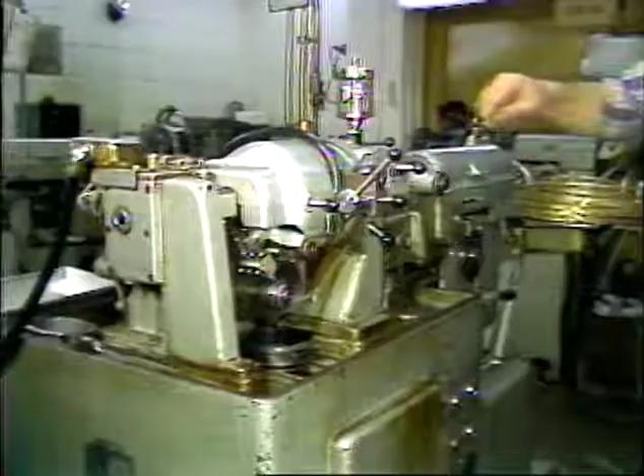Located on the front of the model D4 ESCOMATIC is the indexable drill turret. Located on the indexable drill turret are two driven drill spindles. The position of the drill spindles is adjustable for centering them to the stock guide bushing.

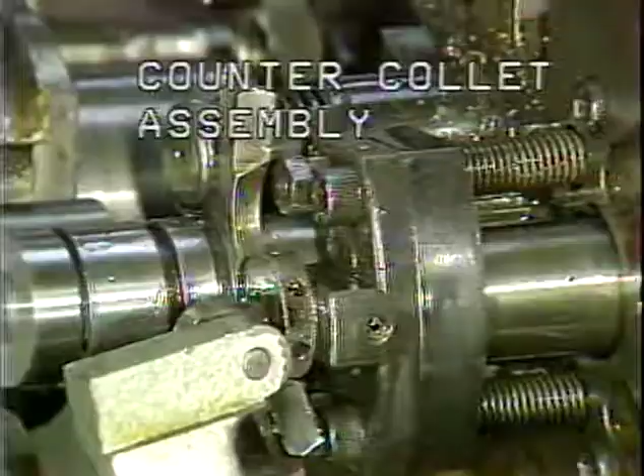Also located on the indexable drill turret is the counter collet assembly. The counter collet assembly is adjustable for centering independently from the drill spindles.

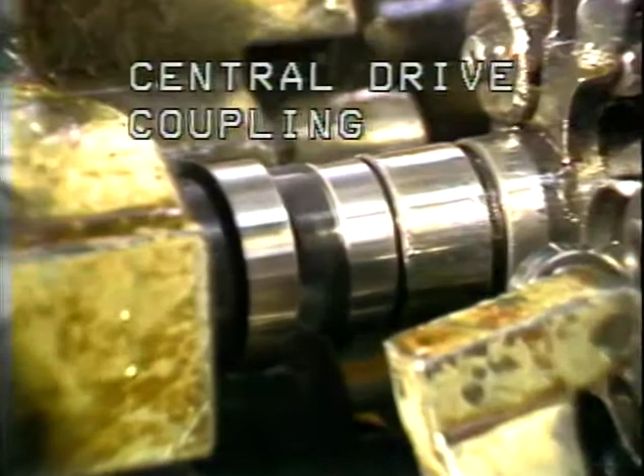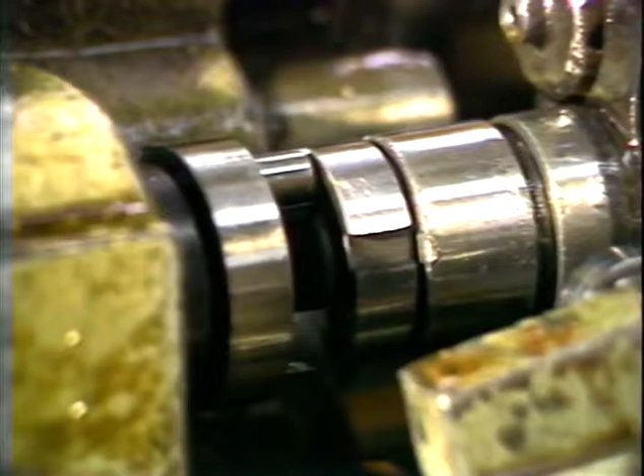Located here is the central drive coupling. The purpose of the central drive coupling is to supply rotation to the drill spindles. The coupling is driven from the drill pulleys in the base of the machine. Drive to the coupling starts and stops with the main motor.

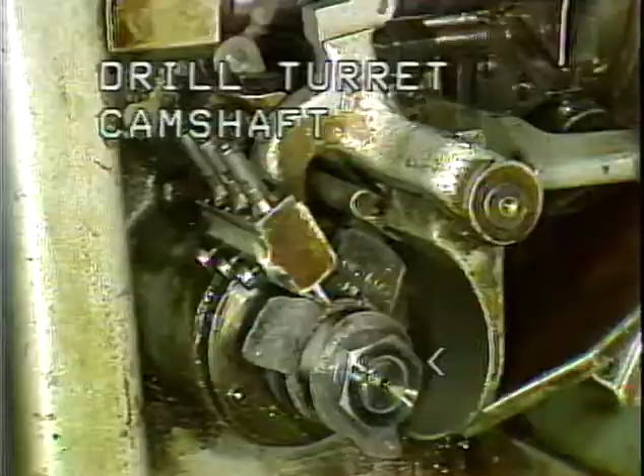The approach, feed, and return of the drills and counter collet into and out of the tooling area is controlled by the cams on the drill turret camshaft. Zero of the drill turret camshaft corresponds to zero of the main camshaft.

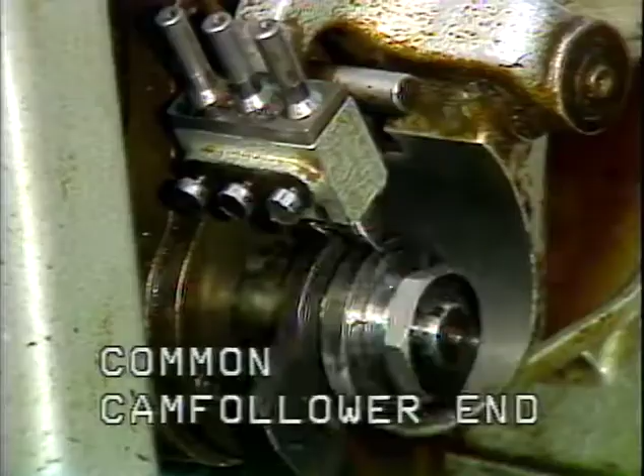This is the drill turret cam follower lever. Located here is the common cam follower end of the lever. The common cam follower end holds 3 cam followers, 1 for each cam.

Located at the opposite end of the drill turret cam follower lever is the contact roller. The purpose of the roller is to contact and move the drill spindles and counter collet into the tooling area.

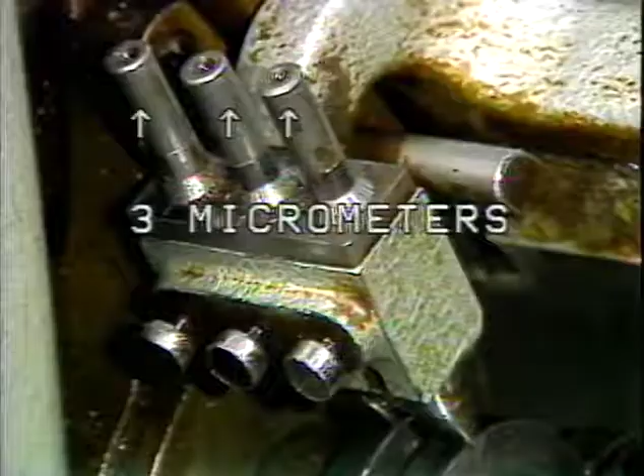Located on the top of the common cam follower end are 3 micrometers. Below the 3 micrometers are the 3 micrometer lock screws. The purpose of the micrometers is to adjust the exact depth of the drill spindles and counter collet into the tooling area. The micrometer closest to the machine frame is marked tool position 3.

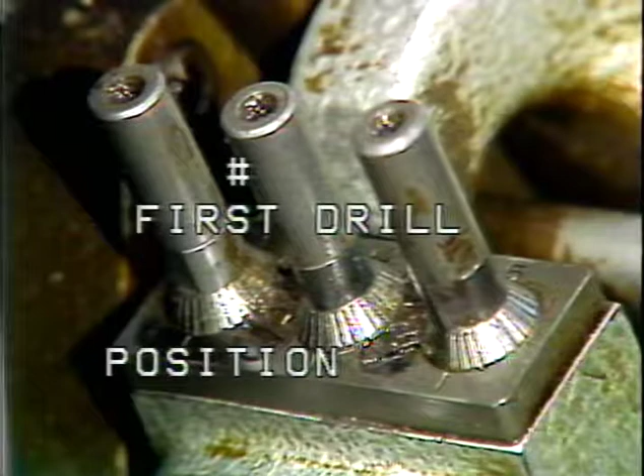This position is usually used to control the counter collet. This micrometer is marked tool position 4. This position is usually used to control the spot or first drill. This micrometer is marked tool position 5. This position is usually used for controlling the second drill.

Located at the base of each micrometer are these gradation marks and index lines. Moving one gradation mark past the index line will be an adjustment of 1/2 thousandth.

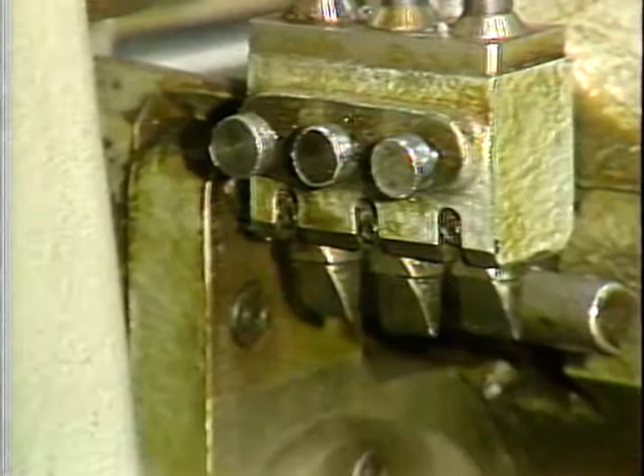Located here just above the cam followers are the cam follower lock screws. The cam follower lock screws hold the cam followers in the cam follower holders.

This is a typical drill and collet cam used on the model D4 ESCOMATIC. Each cam is usually marked as a drill cam or collet cam. This arrow indicates the clockwise rotation of the camshaft.

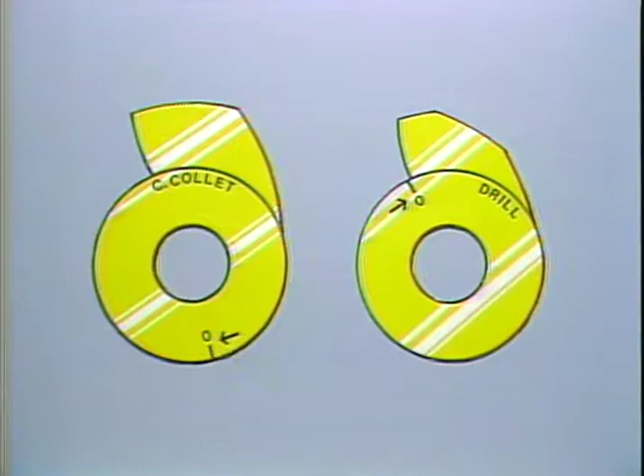Each cam can be divided into 4 portions. This is the rapid approach portion of the cam. The purpose of the rapid approach portion of the cam is to quickly move the tool into position in the tooling area.

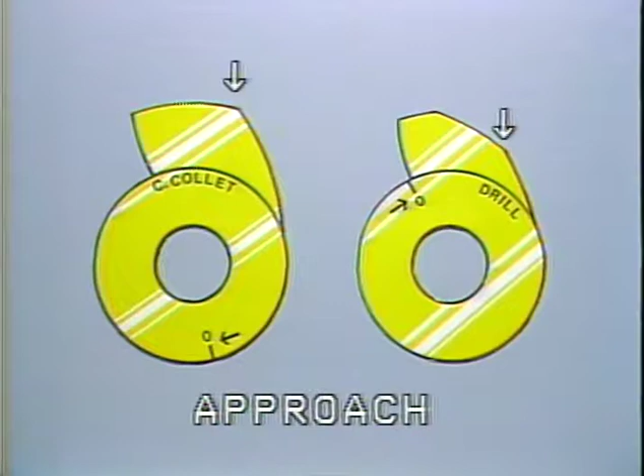This is the approach portion of the cam. The approach is also the start of the feed portion of the cam. The approach is short and only lasts a few cycle degrees. The purpose of the approach is to allow the tools to slowly approach the workpiece before cutting begins.

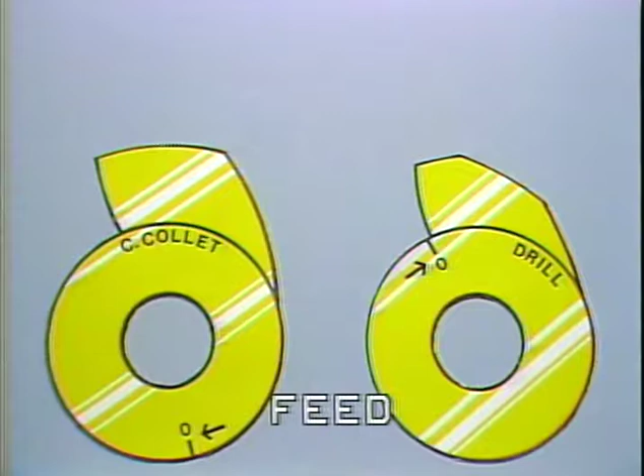This is the feed portion of the cam. On the drill cam, this feed portion can be a rise, fall, or a dwell depending upon the job. The feed portion of the collet cam is usually a dwell. The purpose of the feed portion of the cam is to cause the drill to cut slowly to its correct depth or to hold the collet in position to clamp the finished part at cutoff.

This is the rapid return portion of the cam. The purpose of the rapid return portion of the cam is to rapidly return the tool out of the tooling area of the machine. Indexing occurs just after full return of the cam follower lever and before the rapid approach portion of the next cam begins.

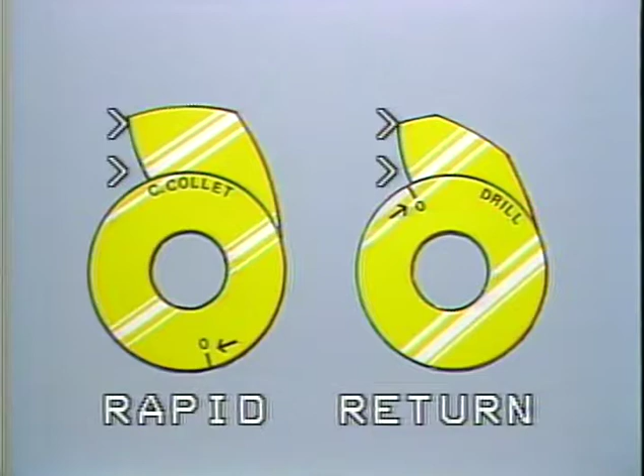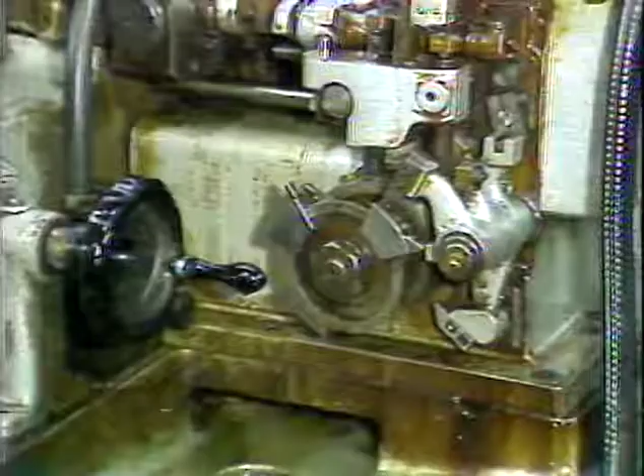Located on the back of the drill turret camshaft are the 3 index trip dogs. Each trip dog will cause the drill turret to index once. The purpose of the index trip dogs is to control the exact time the turret will index.

The index trip dogs contact the index trip dog lever. The purpose of the index trip dog lever is to activate the indexing operation, which is controlled inside the command unit at the front of the machine.

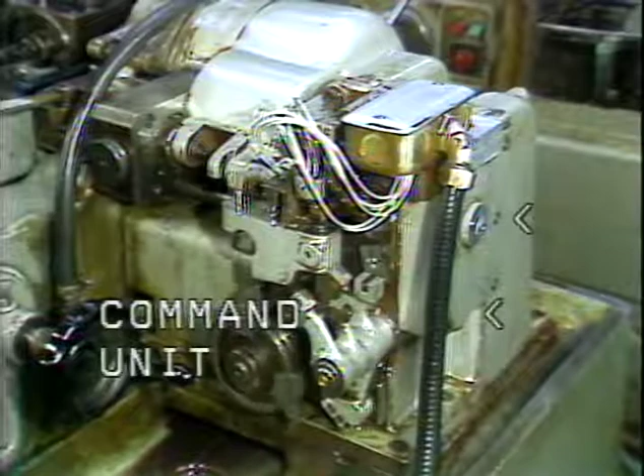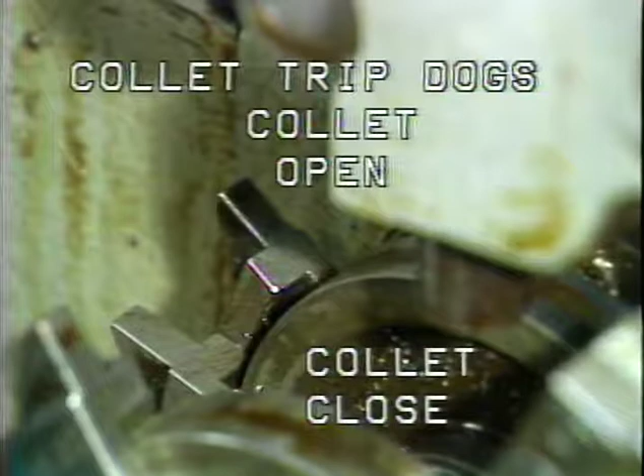Located just behind the 3 index trip dogs are 2 collet trip dogs. One trip dog controls the opening of the collet. The other collet trip dog controls the closing of the collet. The purpose of the collet open and close trip dogs is to control the exact time the collet will be closed, then opened.

The collet open-close trip dogs contact the collet open-close trip dog lever. There is one trip dog follower on the top and one on the bottom of the lever. The lever rocks back and forth as the trip dogs operate it. When the top of the lever is forced back, the collet opens. When the bottom is forced back, the collet closes.

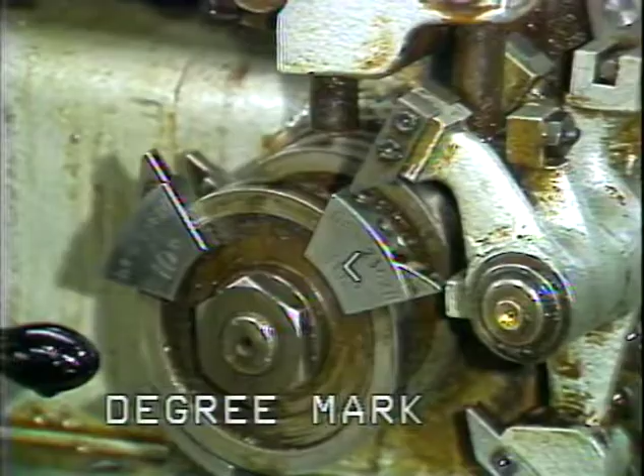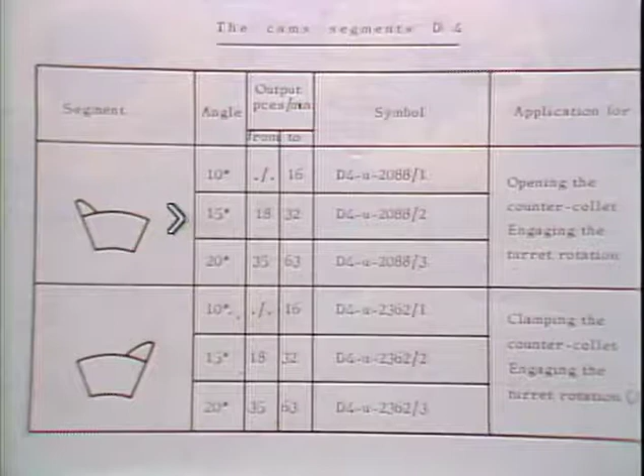Each trip dog is marked with a part number and a degree mark. For different production rates, the trip dogs should be changed to the proper degree marking. For production rates of 1 to 16, a 10-degree trip dog should be used. For 18 to 32, a 15-degree trip dog is used. For 35 to 63, a 20-degree trip dog is used.

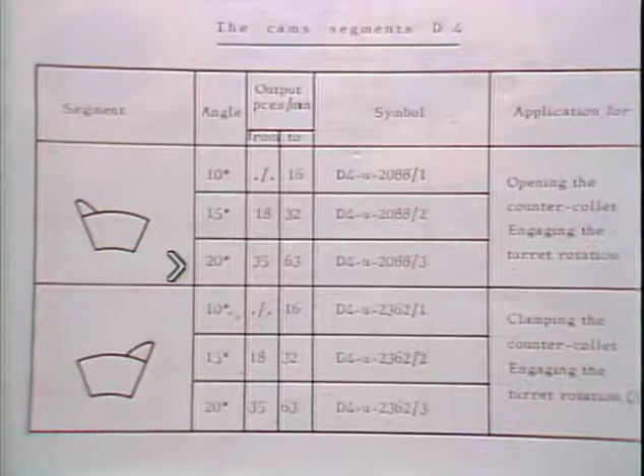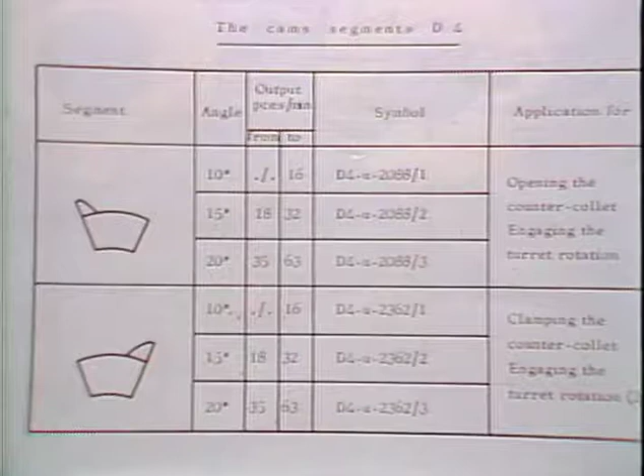Notice that there are also two different trip dogs shown. This trip dog is used for turret indexing and opening the counter collet. Only one of this type is used for turret indexing. This trip dog is used for turret indexing and clamping the counter collet. There are two of this type used for turret indexing, both mounted to the outside of the index trip dog holder.

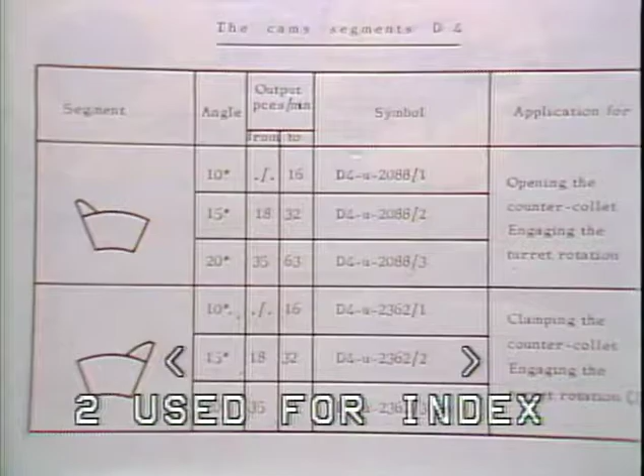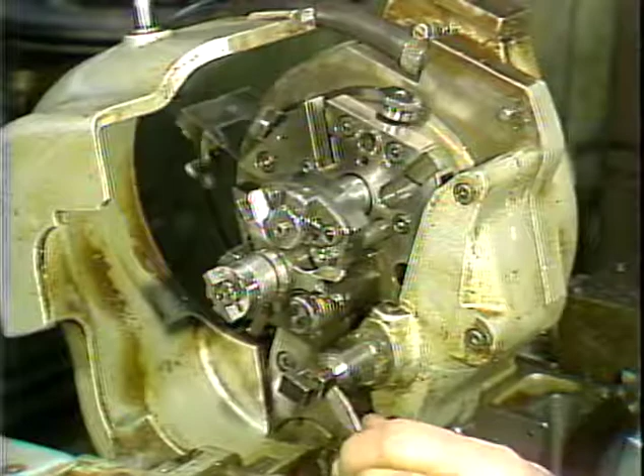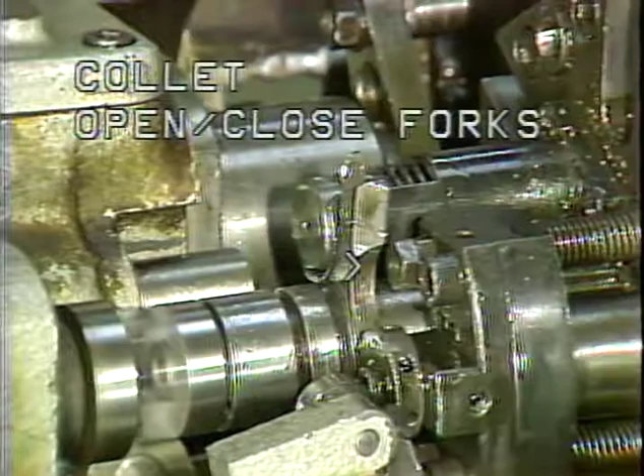Located here, just behind the drill spindles and collet assembly, are the collet open-close forks. The collet open-close forks are moved by this collet open-close finger.

When the collet close trip dog signals collet close, the open-close finger will move the fork up to close the collet. When the collet open trip dog signals collet open, the open-close finger will move the fork down to open the collet.

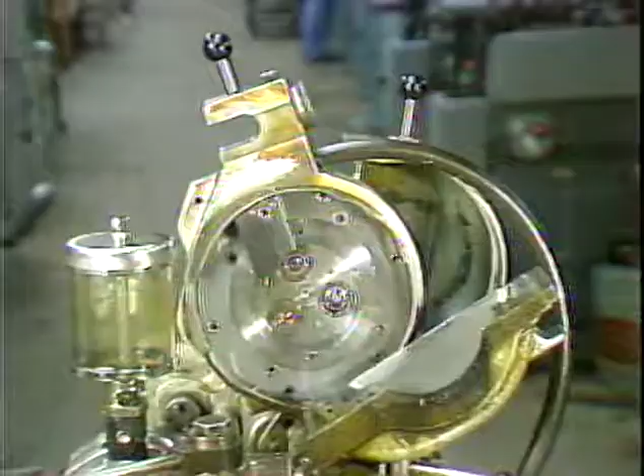This is the face of the drill turret. Located here is the oil tube. The purpose of the oil tube is to provide coolant to the cutting tools and drills during operation.

These are two drill collets. This is the counter collet used to hold the part during cutoff.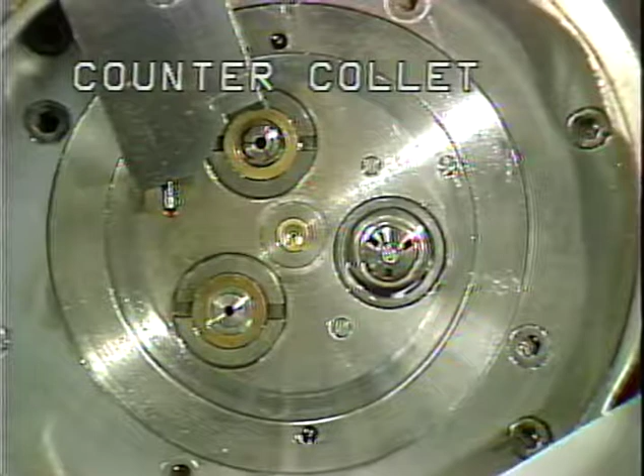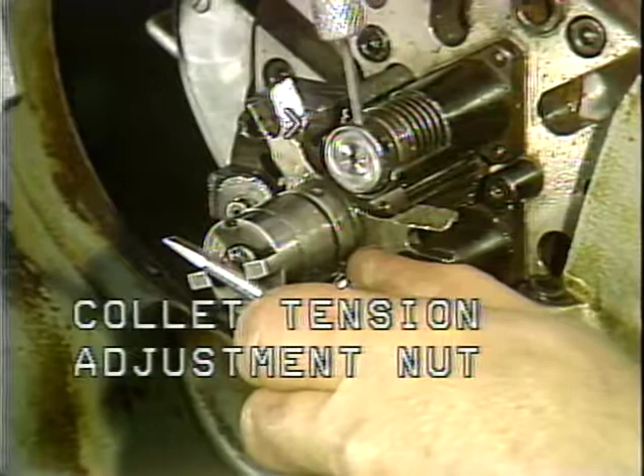To remove a drill collet from the drill spindle, hold the central drive coupling from rotating. Next, turn the drill collet tension adjustment nut on the back of the drill spindle counterclockwise. Continue turning the adjustment nut until the assembly is loose. Remove the tension adjustment nut and collet holder rod combination. The collet can now be removed from the drill spindle. You may have to push the collet loose with the collet holder rod.

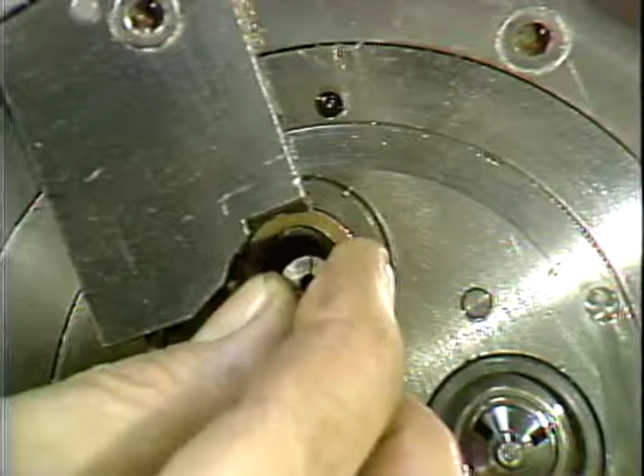These are the basic components of the drill collet assembly. This is the drill collet tension adjustment nut. Its purpose is to adjust the holding pressure of the drill collet on the drill. This is the collet holder rod. Its purpose is to thread onto the back of the drill collet and pull the drill collet back into the drill sleeve.

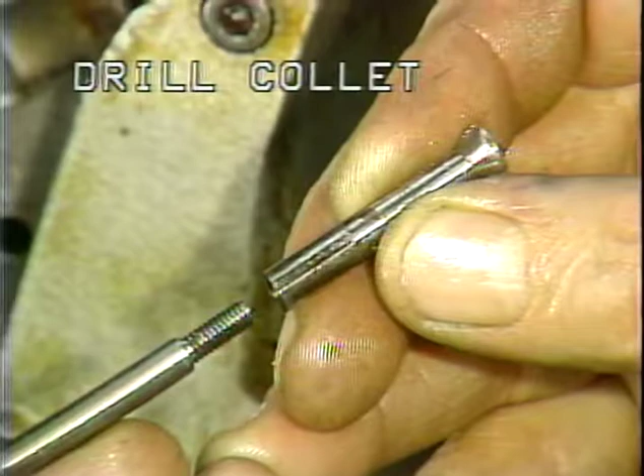This is the drill collet. Its purpose is to hold the drill during the drilling operations. Each drill collet has a keyway that aligns with the key in the drill spindle.

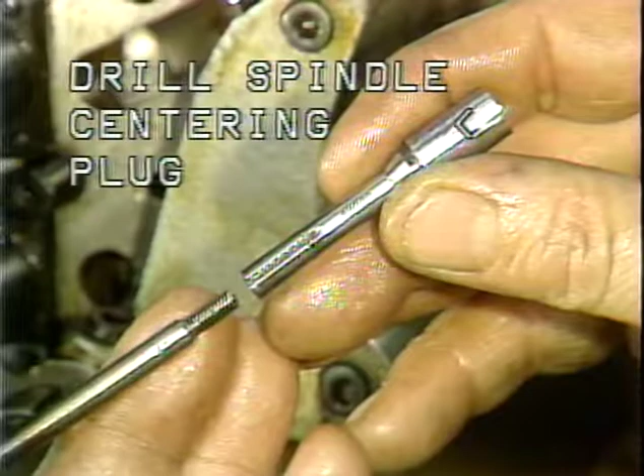This is a drill centering plug. The drill centering plug threads onto the collet holder rod in place of the collet. The plug is used to align the drill spindle to the empty guide bushing bore.

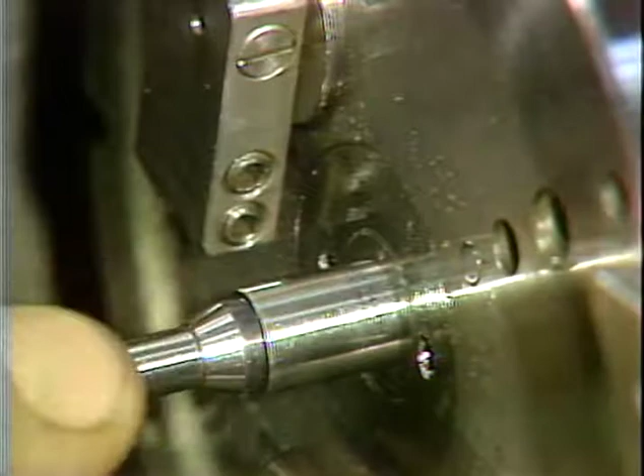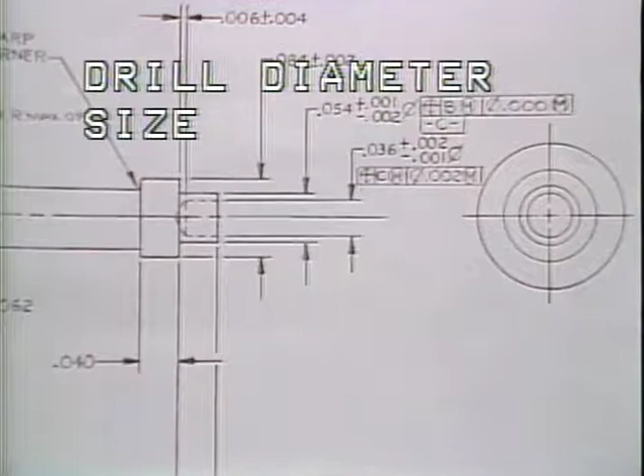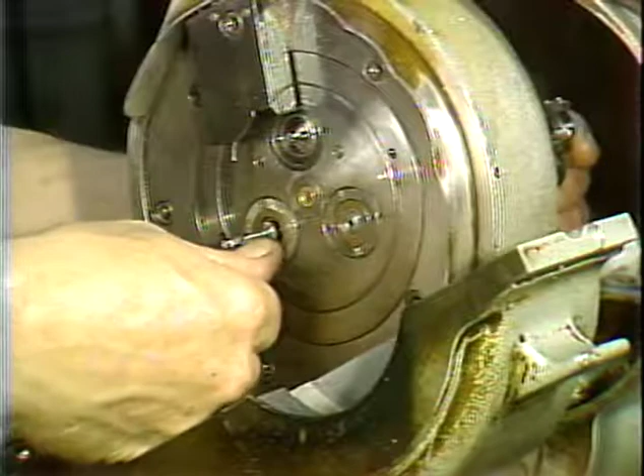Insert the drill into the drill collet. Install the drill and collet into the drill sleeve, making sure to align the keyway on the drill collet to the key of the drill sleeve. Insert and thread the collet holder rod to the collet.

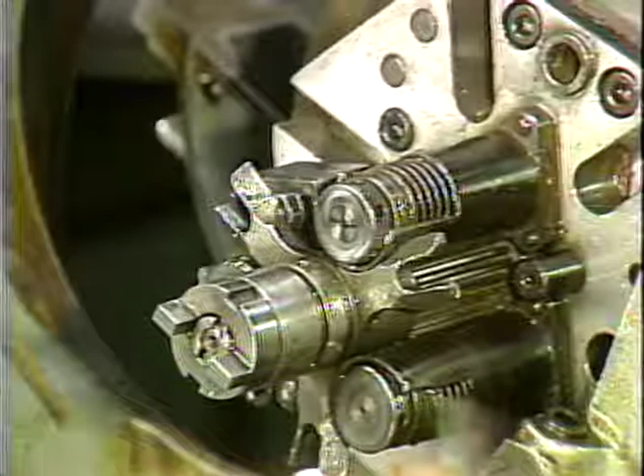Next, measure the distance from the drill tip to the front of the drill sleeve and adjust the drill for the proper dimension. Hold the central drive coupling from rotating and tighten the drill collet with the drill collet tension adjustment nut.

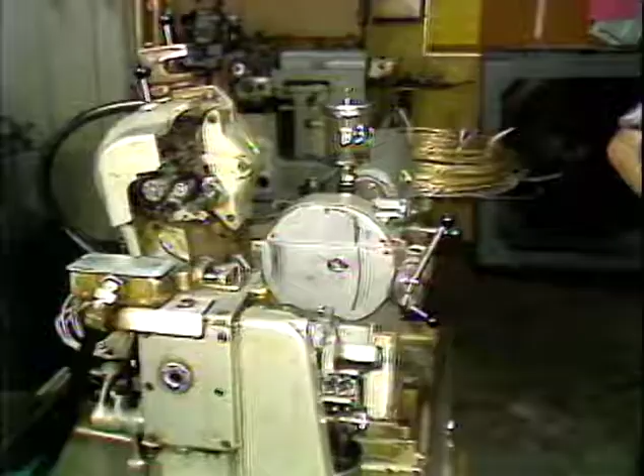Make sure that when the drill turret is lowered, the drills clear the tool area cover by a minimum of 1 millimeter. To remove the counter collet from the machine, first loosen the counter collet holder tube lock screw.

Now turn the counter collet tension adjustment nut counterclockwise. This will unthread the counter collet from the counter collet holder tube. You may have to push the counter collet holder tube forward to remove the counter collet. Remove the counter collet from the face of the drill turret.

These are the basic components of the Model D4 ESCOMATIC counter collet assembly. This assembly uses a spring-loaded ejector pin to eject the finished part after cutoff and indexing.

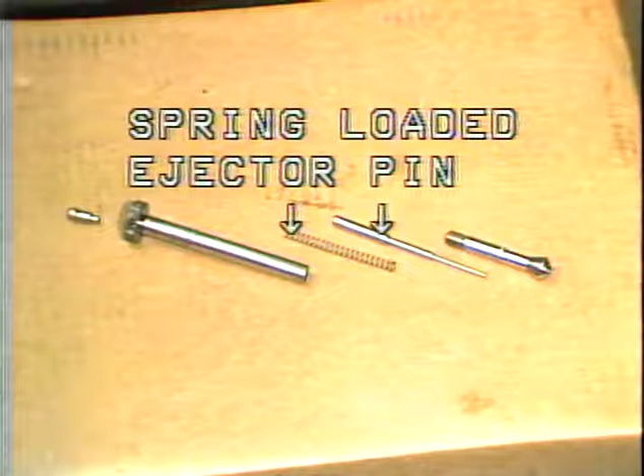This is the counter collet. Each counter collet has a keyway to align with the key in the counter collet sleeve.

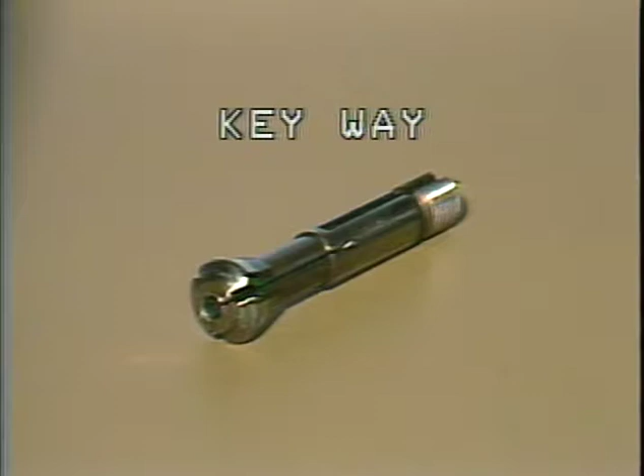The counter collets are marked with the size stock it can grip. The collet size should be chosen to be in the middle of the part tolerance range. This tolerance information can be found on your part print or layout sheet.

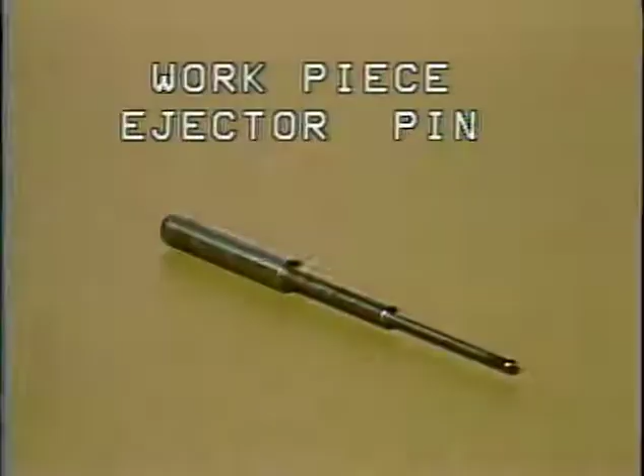This is the workpiece ejector pin. The ejector pin mounts inside of the counter collet. The ejector pin should be chosen so that the tip of the ejector pin is smaller than the size of the collet opening when the collet is closed. This will make sure that when the collet closes, the collet will grip the part and not the ejector pin.

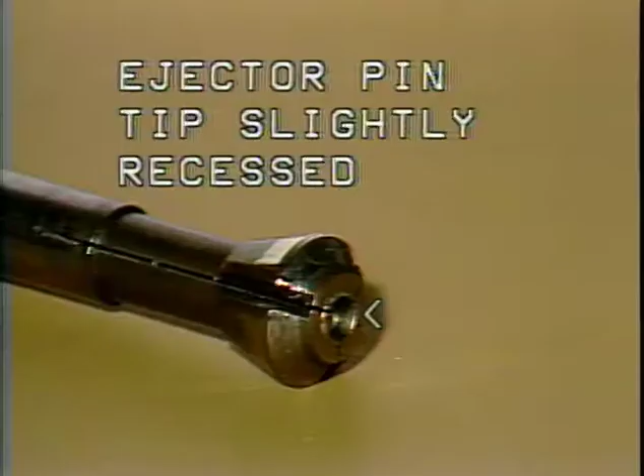When installed in the collet, the ejector pin tip should be slightly recessed into the counter collet. This will allow the part to enter the collet before contacting the ejector pin.

This is the ejector pin spring. The ejector pin spring is compressed as the part is fed into the counter collet. The collet then closes to hold the part. After index, the collet is opened and the ejector pin and spring force the part out of the collet.

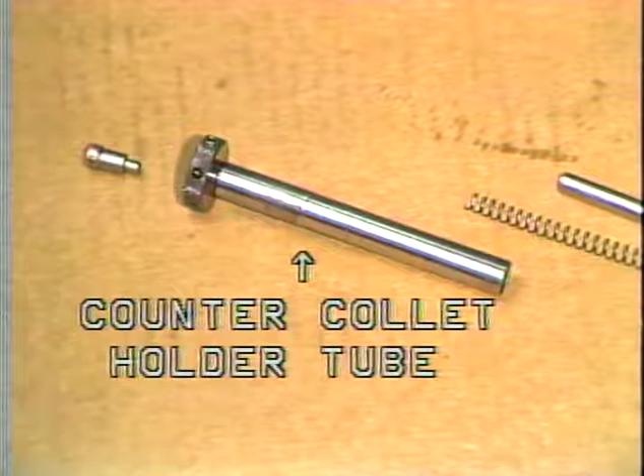This is the counter collet holder tube. The counter collet holder tube threads onto the back of the counter collet. At the end of the counter collet holder tube is the counter collet tension adjustment nut. The purpose of the collet tension adjustment nut is to adjust the collet gripping tension on the part.

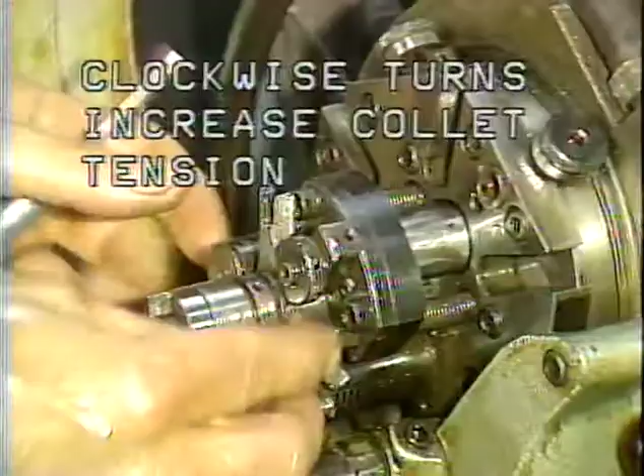As the tension nut is turned clockwise, the collet will be pulled farther back into the collet sleeve, increasing the collet gripping pressure.

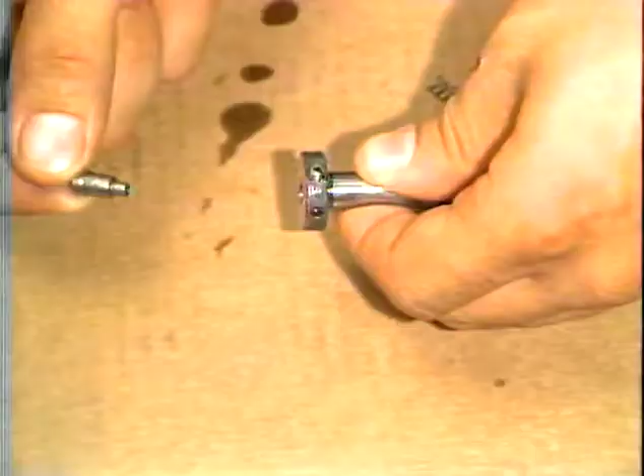This is the collet holder tube plug. The purpose of the holder tube plug is to fill the hole at the end of the collet holder tube. The collet holder tube plug is inserted into the hole at the tension adjuster nut end of the collet holder tube. The plug is held in place by tightening the plug lock screw on the side of the collet tension adjustment nut.

Installation of the plug is the first step in the assembly of the collet assembly. To assemble the counter collet assembly, insert the ejector pin spring into the collet holder tube.

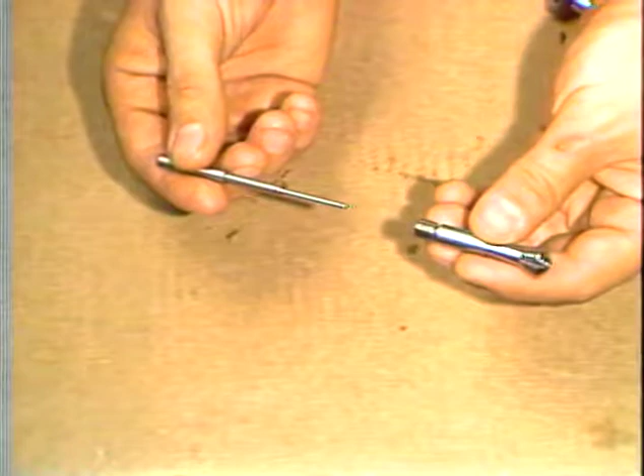Next, insert the part piece ejector pin into the proper size collet for the job. Be sure the tip of the ejector pin is smaller than the size of the collet when the collet is closed and is slightly recessed into the collet.

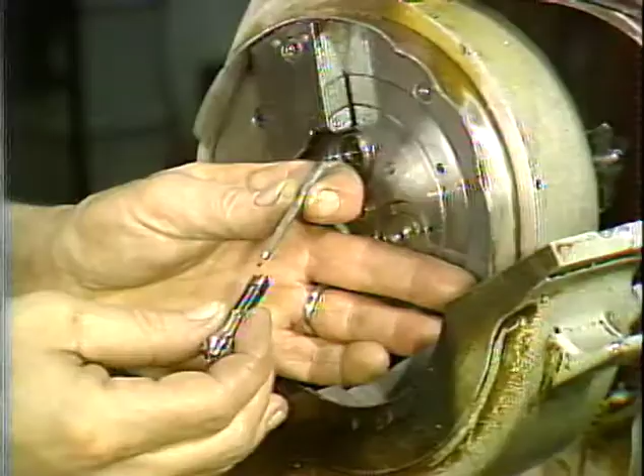Install the collet and ejector pin into the collet sleeve on the face of the drill turret. Align the keyway of the collet to the key inside the collet sleeve.

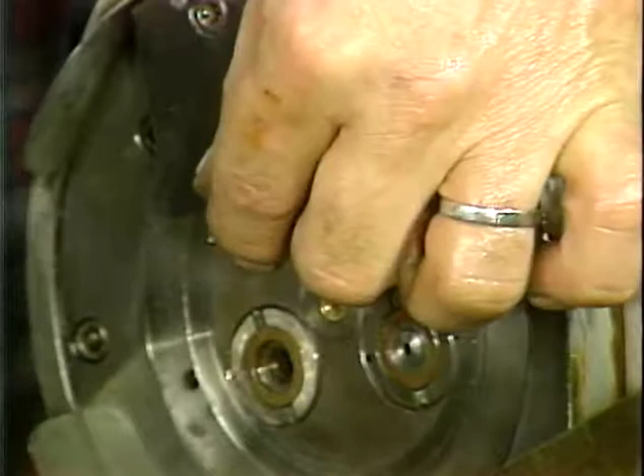With the ejector pin spring inside the collet holder tube, slide the collet holder tube into the back of the collet holder assembly. Hold the collet in place at the face of the drill turret as you thread the collet holder tube onto the back of the counter collet.

Temporarily snug the collet holder tube lock screw.

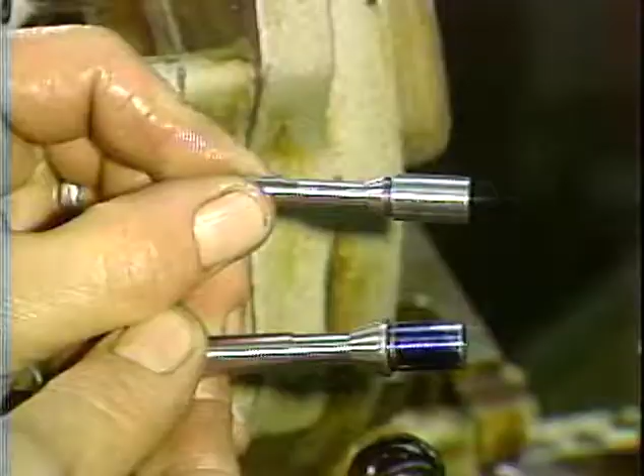During setup of the drill spindles and counter collet, both assemblies may have to be centered. This is the drill centering plug and the collet centering plug. Both plugs align with the empty guide bushing bore.

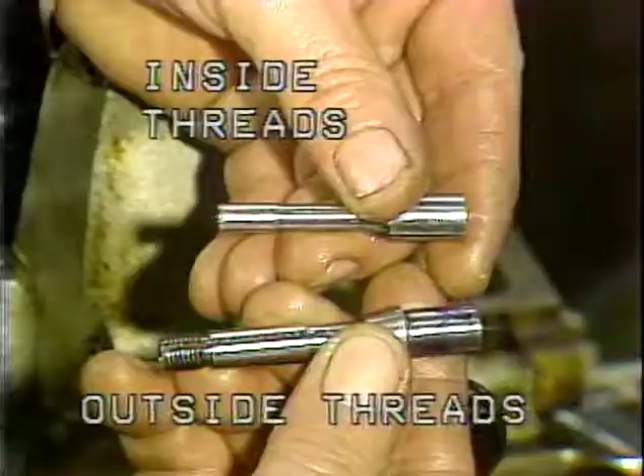You can identify the drill centering plug by internal threads. You can identify the collet centering plug by external threads.

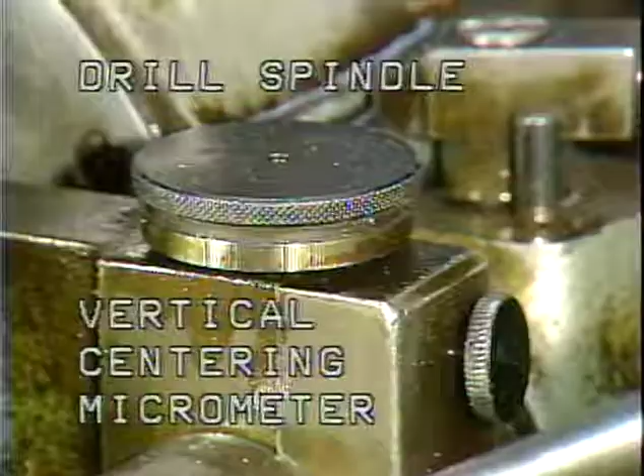Centering controls for the drill spindles are the same as those used on the counter collet carrier plate on the Model D2. These controls move the entire drill turret position vertically and horizontally. The centering procedure is the same except for the use of the drill centering plug in the empty bushing.

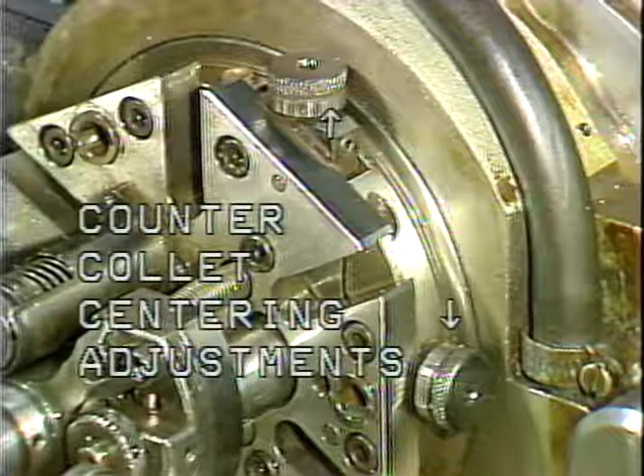The counter collet assembly uses its own set of centering controls. This allows the collet assembly to be centered independently from the drill spindles. The counter collet centering controls only affect the collet assembly. The collet assembly should be centered after centering the drill spindles. The drill spindle centering will affect the counter collet position.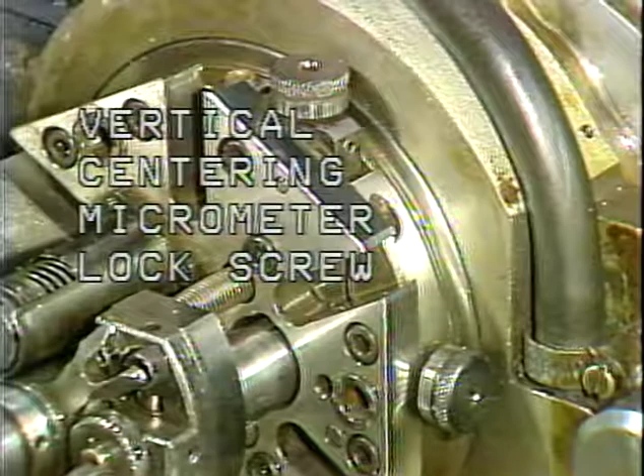This is the counter collet vertical centering adjustment micrometer. Located below the vertical centering micrometer is the vertical centering adjustment lock screw. This is the horizontal centering adjustment micrometer. Located above the horizontal centering adjustment micrometer is the horizontal centering adjustment lock screw.

Before adjusting the centering adjustments, these two collet holder assembly lock screws must be loosened. The purpose of the two collet holder assembly lock screws is to lock the collet assembly to the drill turret.

To center the collet, install the collet centering plug into the collet sleeve. Index the drill turret manually if necessary to align the collet sleeve to the bushing bore.

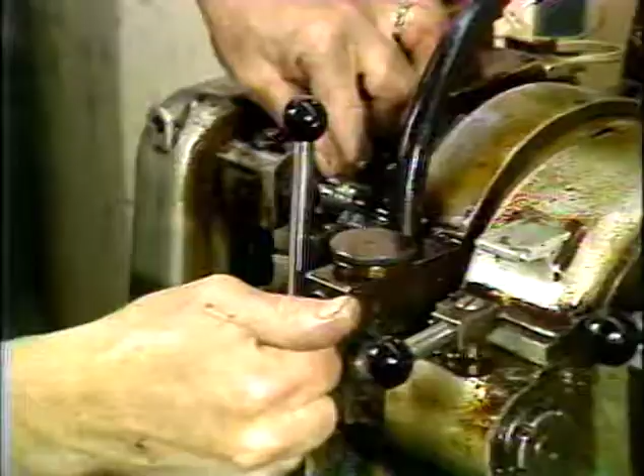Down and lock the drill turret in place. Next, loosen the collet assembly holder lock screws.

Loosen each of the vertical and horizontal centering adjustment lock screws.

Manually move the collet centering plug into the empty guide bushing bore. Continue to move the assembly in and out and adjust the vertical and horizontal micrometers until the plug moves smoothly. Lock the collet assembly holder lock screws.

Check the centering. Then lock the micrometer lock screws.

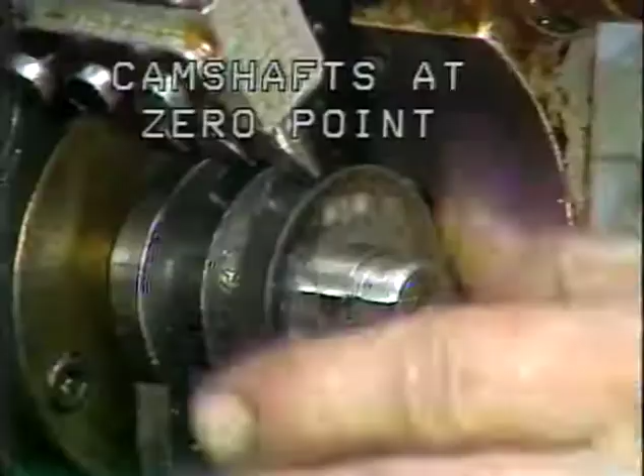Make sure that the main camshaft is set to 0 point. Mount the drill and collet cams to the drill turret camshaft.

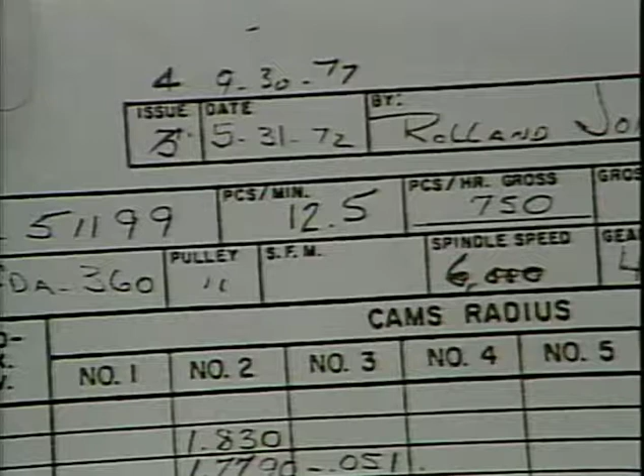Next, check your layout sheet for the production rate for the job. The index and collet trip dogs must be changed to meet the production rate. If necessary, remove and install new index and collet trip dogs.

Each trip dog is held to the trip dog carriers by 2 trip dog mounting screws located here. Mount 2 2362 trip dogs to the outside of the index trip dog carrier. Mount one 2088 trip dog to the inside of the index trip dog carrier.

Also mount the collet open-close trip dogs. Mount one 2362 collet trip dog to the outside of the collet trip dog carrier. Mount one 2088 collet trip dog to the inside of the trip dog carrier.

Only tighten the mounting screws enough to keep the trip dogs on the carriers. The trip dogs must be able to be moved. Final adjustment must still be done.

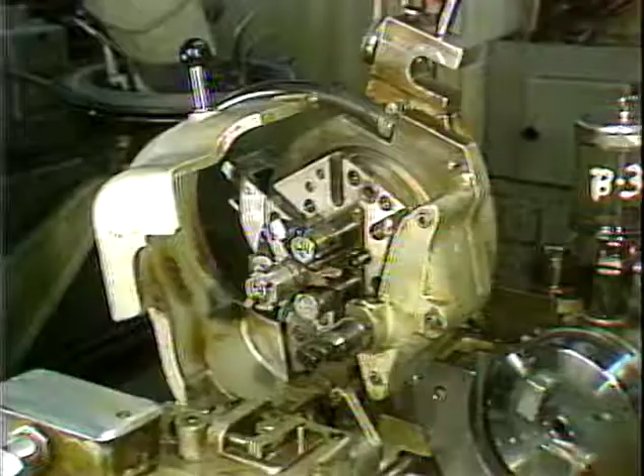Now index timing must be set. First set the timing with the turret locked in the up position. Hand crank the machine from 0 until the cam follower is dropped down fully from the first cam's rapid return. Stop hand cranking.

Slide one 2362 trip dog until the cam follower contacts the trip dog 1/4 to 1/2 way up the index trip dog. Lock the trip dog in place.

Again hand crank the machine. Make sure index is complete before the cam follower begins to ride on the next cam's rapid approach. Continue to hand crank to the end of the next cam's rapid return.

Set another 2362 trip dog in place under its follower and lock the trip dog in place. Again, check that the index is proper.

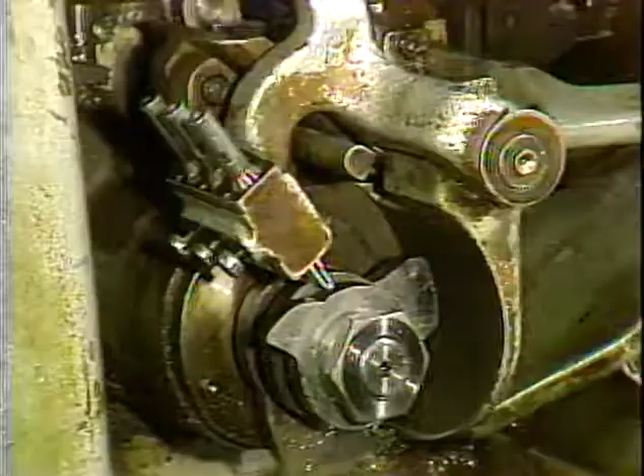Hand crank to the next cam's end of the rapid return. If this point is 0, go slightly past 0. Set the 2088 trip dog in position and lock the trip dog in place.

Now set the collet open-close trip dog timing. Hand crank the machine past the counter collet cam and stop just after the turret indexes.

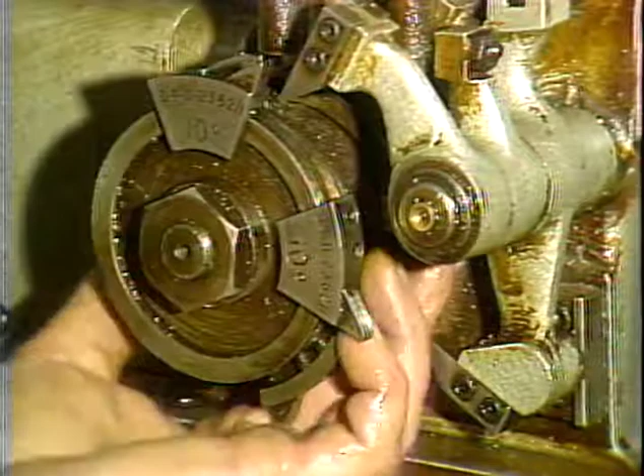Set the collet open trip dog in position under the top trip dog follower. Lock the collet open trip dog in place. You may have to hand crank the machine to lock down the other trip dog mounting screw.

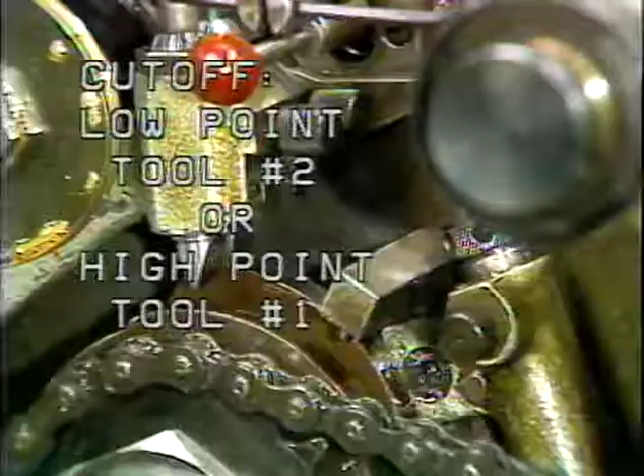To set the collet closed trip dog, hand crank the machine and stop when the tool cams are positioned just before part cutoff.

Move the collet closed trip dog into position under the bottom trip dog follower and lock it in place. You may also have to hand crank the machine to finish tightening the mounting screws.

Now select and install the drills and drill collets into the drill turret. Set the drill dimension. Install a counter collet into the machine, but do not lock it in place.

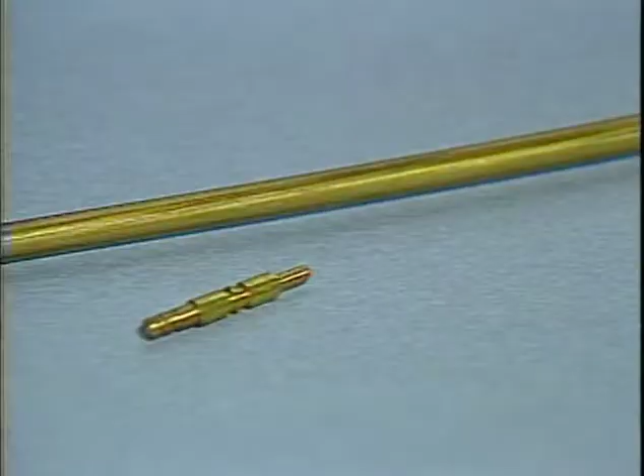Collet gripping tension can now be set if the collet is to grip on a stock diameter, or if a sample part is available. If not, the tension will have to be set after cutting the part to produce the dimension that will be gripped by the collet.

Unlock the collet holder tube lock screw. With the collet open-close fork in the open position and the collet tension adjustment nut backed off, insert the sample part or piece of straightened stock into the collet. Rock the collet open-close fork to close, then open the collet.

Increase the collet tension with the collet tension adjustment nut until the part is just held without being forced out of the collet. Slightly increase the tension. Open and close the collet with the collet open-close fork. Make sure the collet tension still holds the part.

Leave the collet in the open position. Lock the collet holder tube set screw.

Now the drill depth and collet position in the tooling area can be set. You should have previously completed all other machine timing and setup. Check the position of the drill turret tools at 0 of the drill turret camshaft.

If necessary, index the turret by hand to move the right tool in position with respect to the cams. Lower the drill turret down. Loosen the micrometer lock screws and back off the 3 micrometers.

Start the machine. Push the hand wheel in and hand crank the machine to the midpoint of the rapid approach of the first drill cam. Move the drill lever to check for the clearance between the drill and the stock. The drill should not touch the stock until after the approach of the cam.

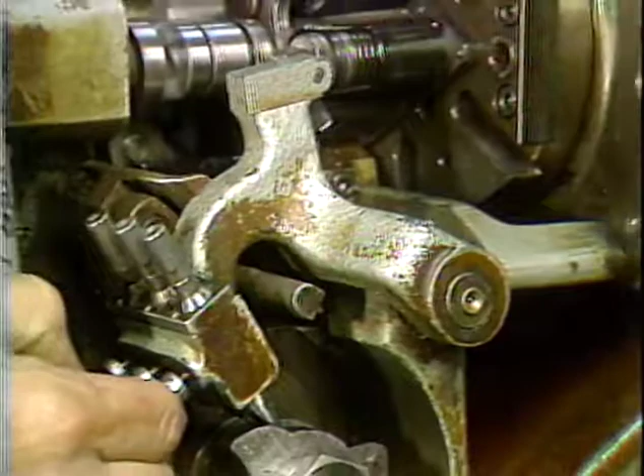Continue to hand crank the machine and stop at the midpoint of the rapid approach of the collet cam. Stop the machine and open the tool head cover. Check that the collet moves over the part.

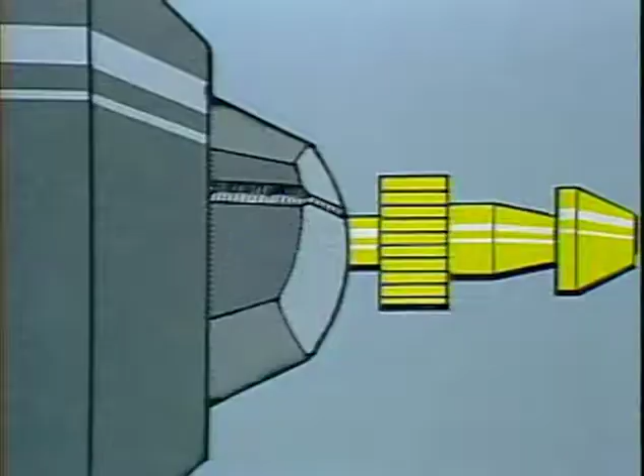Restart the machine and hand crank until the start of the collet cam approach. Then stop the machine. Adjust the collet with a collet position micrometer to be over the proper point on the finished part.

Adjust the collet for proper gripping tension if it has not been set earlier.

Start the machine and allow the machine to produce a few finished parts. This completes your television training tape on the Model D4 drill turret.